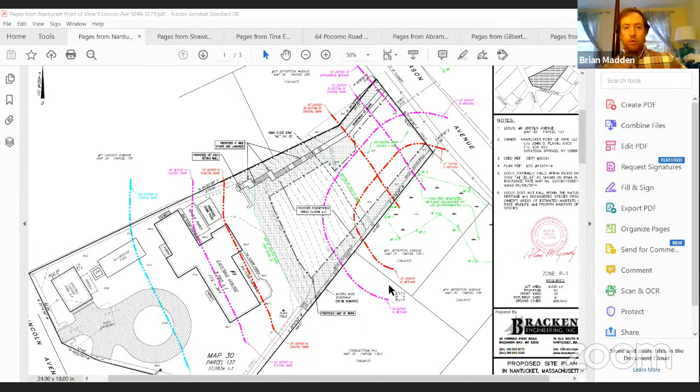Thank you very much. We're going to request a continuance to October 29th as well. Sorry for the late notice. Okay, so this one will continue until October 29th as well. Thank you, Brian. Thank you.

That moves us on to Shawkemo 1 LLC at 36 Shawkemo Road, represented by Brian Madden and Don Bracken. Thank you very much, for the record, Brian Madden.

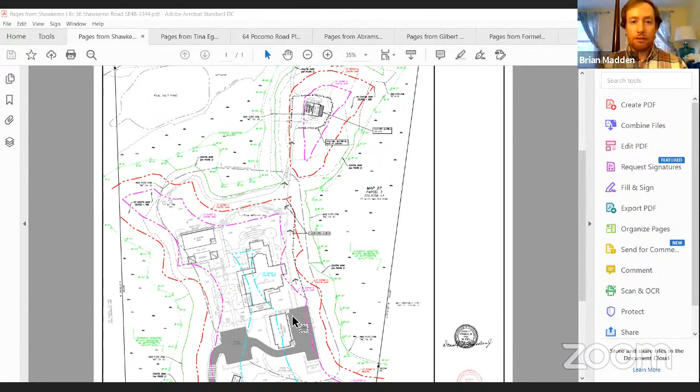At the last meeting we continued because we didn't have the natural heritage letter, which we do have now, showing no adverse impact, no take. We've shown the proposed construction access route that avoids any intrusion into the 25-foot naturally vegetated buffer zone. On the east side of the house, abutting the retaining wall, that's all through previously landscaped conditions, primarily planted arrowwood shrubs that will be replaced in kind post access, meeting up with the existing lawn area and footpath out to the work areas. No waivers are being requested, and I'll turn it over to questions.

Thank you, Brian. Are there any questions from commissioners? Looks like not. Are there any questions from the public? We have not received any comment, but we do have all of the required information to close.

All right, Brian, would you like to close? Please. Is there a motion to close? Motion to close, Dave. Maureen, do you want the second? Yes please. Maureen gets a second, so by roll vote: Beal, aye. Engelborg, aye. Erisman, aye. Golding, aye. LaFleur, aye. Phillips, aye. That carries unanimously. Thank you very much. Thank you, Brian.

That moves us on to Tina Eger McGoldrick Trust at 33 Quidnet Road, represented by David Haines. Good evening. This notice of intent was opened, I believe, four weeks ago. We discussed it and continued because we had comments from Natural Heritage that we had to address, in that they wanted a revised plan, including basically the revised layout of the driveway.

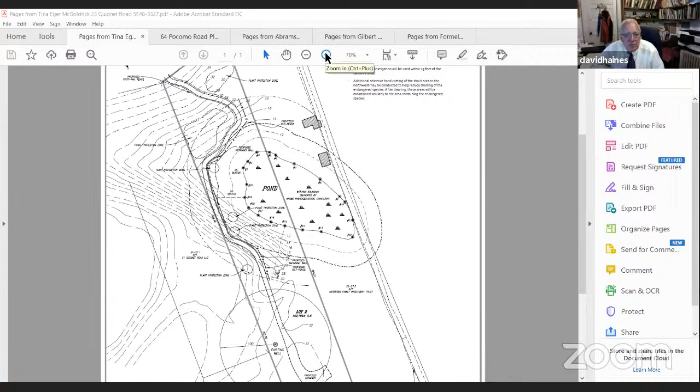Also, they had questions about grading and requested fencing to be put up. So we've revised the plan and the layout to avoid sensitive plants, and we've put up a split rail fence along the edge of the driveway. In some areas, we're proposing a low retaining wall on the downhill side of the driveway to limit grading and prevent intrusion toward sensitive plants. All work will remain outside of any existing vegetation within 25 feet. There's one small area where the driveway just barely hooks into the 50-foot zone; other than that it's outside the 50 all the way. All structures are outside of 50.

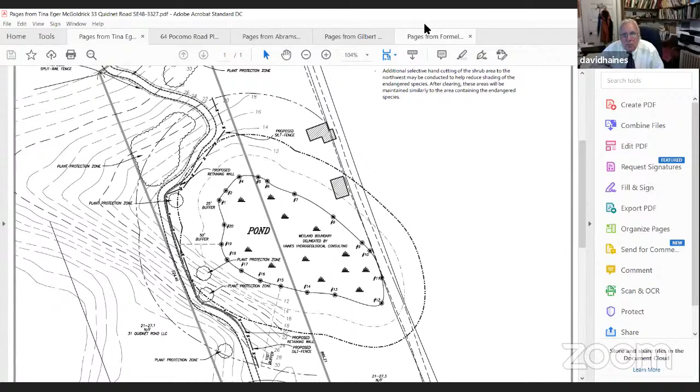There's no need for any dewatering, and so there are no waivers requested from the commission. With that I would send it back to the commission. Thank you, David.

All right, are there any questions from commissioners? Dave? Curious what type of retaining wall is going to be built alongside the east side of that drive? It hasn't been designed yet, but what I was envisioning is basically some sort of wooden sheet piling. It's only going to be a couple of feet high, so without a footing. It's got to be designed; it hasn't been designed yet.

Okay, thank you. Any other questions from commissioners? Maureen? David, I was wondering on the existing asphalt driveway, which I know is not at issue here, but where you see that coming down, it must be old since it comes quite near — it looks like within the 25 of whatever the wetland is that's denominated there. Are they going to do anything with the old driveway? Do you know? I'm just curious because obviously it's asphalt and would be nice if it weren't there. Well, we discussed that, and I first envisioned that driveway would be removed.

However, because of the sensitive plants that are out there, our driveway is basically only 8 feet wide, and we would like to keep that second driveway for emergency vehicles and gas trucks. So that's why we'd like to keep it; I understand the commission's concern about that. I actually got this driveway permitted about 25 years ago, when there wasn't a 25 and 50-foot setback. I don't remember having asphalt in it, but that I'm sure was all taken care of. Okay, thank you, I appreciate the information.

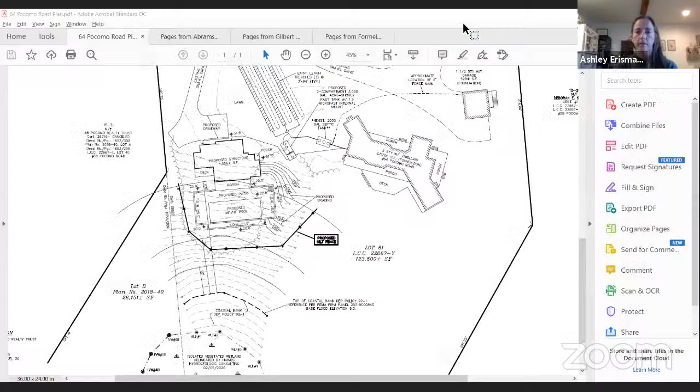What is proposed at 64 Pocomo Road is the construction of a swimming pool and a porch, with an associated pool house that's just outside or right at the buffer zone. This is in the buffer zone, there is a coastal bank by policy, and there's also an isolated vegetated wetland at the bottom of the slope.

All structures will be outside of 50. Basically, the existing shrub line will be maintained, except for some areas inside of 50, outside of 50. The pool will have a retaining wall around it on the lower side to limit any kind of grading.

It'll be a canister filter that will require no discharge of any water into the buffer zone. There's sediment and erosion controls shown as a silt fence, with extra on site. All soils will be loamed, disturbed areas will be loamed and seeded or landscaped as appropriate. Basically that's my presentation.

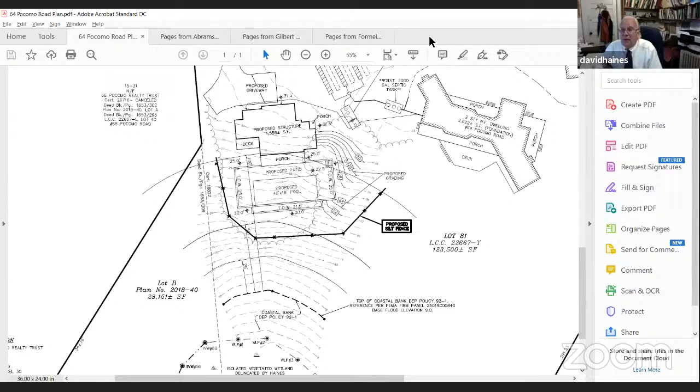Thank you, David. Any questions from commissioners? Looks like no. Jeff, do we have any questions from the public? I asked a little bit late, but we haven't had any at this point.

Jeff, do we have everything we need to close this one? Yes, you do. All right, David, would you like to close? Please. Is there a motion to close? Motion to close. Motion made by Maureen. Is there a second? Seconded by Dave.

By roll vote: Beal, aye. Engelborg, aye. Erisman, aye. Golding, aye. LaFleur, aye. Phillips, aye. That carries unanimously. Thank you, David. Have a good evening. You too.

That moves us on to Abramson at 80 Millbrook Road, represented by Mark Rits. Good afternoon, Mark Rits from Site Design, representing the applicant at 80 Millbrook.

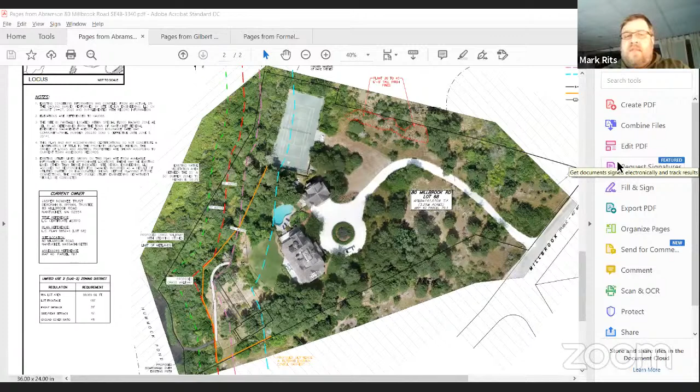During the last hearing for this project, the commissioners raised concerns about trees on the property within jurisdictional areas, and requested seeing a site plan backed with a current aerial photo, which we have provided, showing the extent of trees within the limit of work and jurisdiction on the lower left-hand portion there.

There was also a request to provide a detail of the retaining walls for the pool, and that's actually a double retaining wall, vanishing edge pool, and then a retaining wall below it. That detail has been provided.

The applicant also went out and flagged the trees in the work area that would be removed, the pitch pines. We counted approximately 21 trees. There was a little debate because one or two looked pretty dead, 3 to 4 inches and didn't look to be alive. But we estimate approximately 20 trees will be removed, varying in caliper width from about 4 inches to 10 to 12 inches on some of the larger ones.

The applicant has proposed to replant 30 to 40 pitch pines along the northern portion of the property, shown on this aerial plan a little further up the page. If somebody could please scroll us. It's the area outlined in red.

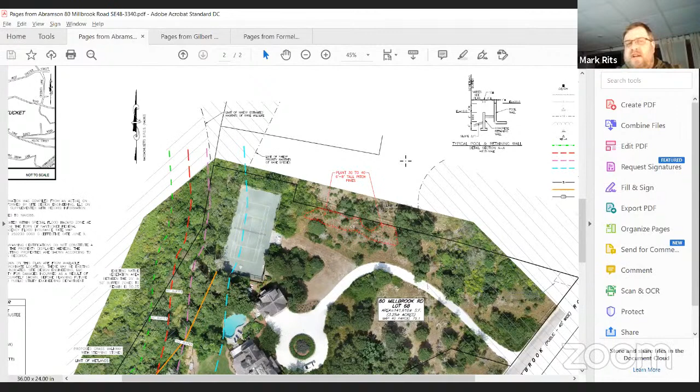We chose that particular area because there are two stands of pitch pines, one to the east and one to the west of it, and we thought we would plant in that relatively sparsely vegetated area, mostly grass with a few existing trees. We would plant 30 to 40, 6 to 8 foot nursery stock pitch pines there to provide mitigation for the lost trees and a greater contiguous pitch pine habitat. That's basically all the additional information I have, happy to answer any questions.

Thank you, Mark. Are there any questions from commissioners? Mark?

Thank you, Madam Chair. I'm having a hard time reading the plot plan. I've got it in front of me, pretty well blown up on my computer, and I can't quite see how the pool will be sited in terms of the grade. There's a substantial grade there.

I want to be reassured that you're not going to be disturbing inside the 50-foot zone there with the corner of the pool being on the edge, and I just wonder how that will be constructed at the time of building, and what will the ultimate elevation be of the pool?

The elevation of the pool will be at 20, and if you look up the top of the page just to the left of the legend, there's a cross section showing it's going to be a double retaining wall. The edge of the pool itself will function as an approximately 4-foot high wall, vanishing edge pool.

Then there will be a narrow area approximately 4 feet wide to capture any splash. And then there will be a second, lower 4-foot retaining wall that is on the plan, shown as the double line that comes up just to the 50-foot buffer.

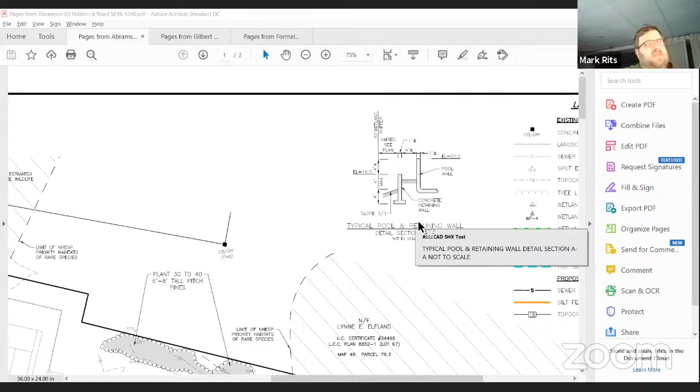Are you confident you can do all that and not disturb our 25 to 50-foot zone? Well, we are proposing grading in the 25 to 50-foot buffer zone there. We're just not proposing any structure there.

Gotcha. And what'll the surface of the path be like? That portion of the path will be grass. We are proposing, if you look just to the north of the pool, we have proposed contours at 12, 14, 16, and 18. We have a pretty steep grade change there.

We're proposing just interspersed stone pavers there, just to have a little bit of a step effect, not building a full staircase or anything, but just putting down a couple of isolated stone pavers.

Then the portion of the path that goes to the west of the pool and all the way down to the dark gray shaded portion, that will just be a grass path. The dark gray shaded portion, which goes from the 25-foot buffer into the wetland, is an existing path already, and that will be the elevated walkway.

To provide adequate room for plants to grow underneath it. But that's an existing path. We're not proposing a new path.

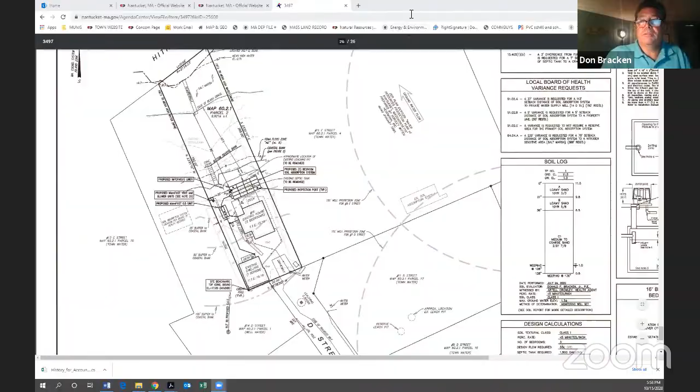Thank you. Are there any questions from commissioners? Looks like no. Jeff, are there any questions from the public at this point? No, ma'am. Do we have everything we'd need to close this one?

Yes, you do. Don, would you like to close? Yes, please. Is there a motion to close?

So moved. Motion made by Beal. Is there a second? Seconded by Dave.

So by roll vote: Beal, Aye. Engelborg, Aye. Erisman, Aye. Coleman, Aye. LaFleur, Aye. Phillips, Aye. That carries unanimously. Thank you, Don. Thank you.

And that moves us on to Jean Francois Formella at 8 Old Westmoor Farm Road, represented by Paul Santos. Thank you. Paul Santos on behalf of the owner and applicant, JF Formella.

This is a notice of intent application for work at 8 Old Westmoor Farm Road. This property was before you within the last few months, when we filed the request for determination of applicability to confirm the resource areas, those being a bordering vegetated wetland and the limits of a certified vernal pool that occurs on the abutting property and a portion of this property.

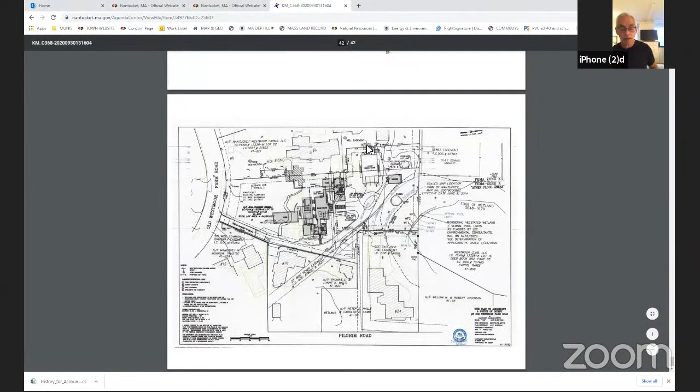We will also be removing the existing gazebo, which is within Concom jurisdiction and actually falls within the regulated setback, the no-build setback for the vernal pool. The gazebo has been there for some time and was constructed before the designation of the vernal pool. So the 2 existing structures will be removed and the gazebo will be removed.

We'll then redevelop the site by constructing a new single-family dwelling that will occur outside of the 100-foot buffer zone, but we will be constructing a small garage that will occur within the buffer zone. It will be outside of the enlarged setback to the vernal pool, which increases the 50-foot no-build to 75 feet, so we will be outside of that setback with the garage.

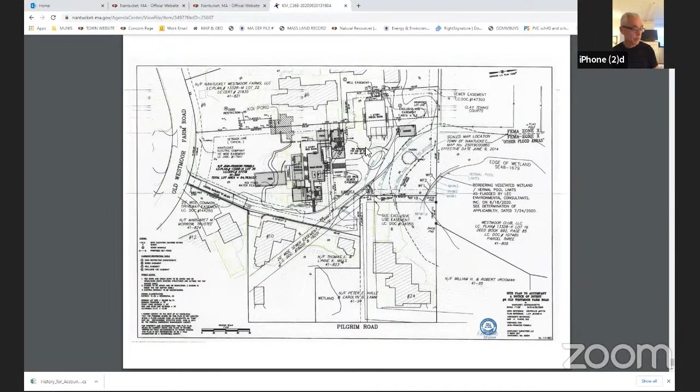This garage is a modest 1-story structure, approximately 28 by 18 feet in dimension. The driveway will then also be reconfigured to accommodate the relocated dwelling and the relocated garage. The work occurs outside of any mapped NHESP jurisdictional area, and there are no waivers required with the application. I'm happy to answer any questions that the commission or staff may have.

Thank you, Paul. Are there any questions from commissioners? Looks like no. Jeff, are there any questions from the public on this one? We have not had any questions or comments, but we also do have all of the required information before you ask that question too. Okay, thank you.

So Paul, since there's no questions and we have all the required information, would you like to close? Yes, please. Is there a motion to close? Motion made by Seth. Is there a second?

Seconded by Dave. So by roll vote: Beal, Aye. Engelborg, Aye. Erisman, Aye. Golding, Aye. LaFleur, Aye. Phillips, Aye. That carries unanimously. Thank you, Paul. Thank you.

And that moves us on to 11 Crooked Lane LLC at Westchester Street Extension, represented by Art Gasbarro. Thank you, Madam Chair. I'm before you tonight with a notice of intent application to install a low-pressure sewer force main along the traveled way of Westchester Street Extension.

This is the road that runs alongside the animal hospital and the backside of some of the properties known as Hickory Meadow Lane. Shown on the plan in front of you in blue is the bordering vegetated wetland boundary. Shown in red are the 25, 50, and in some cases 100-foot buffer zones. And shown in green is the proposed 1.5-inch sewer force main.

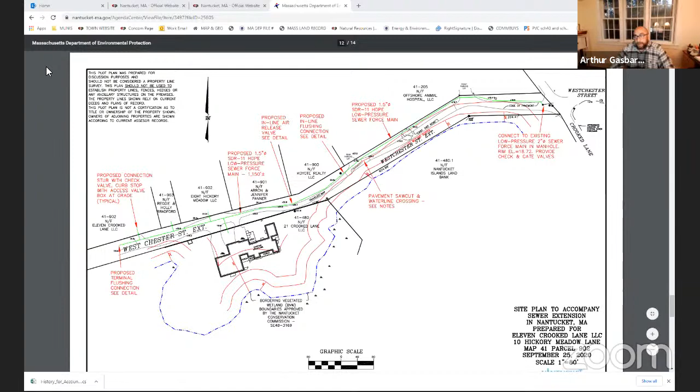Thank you, Art. Are there any questions or comments from commissioners?

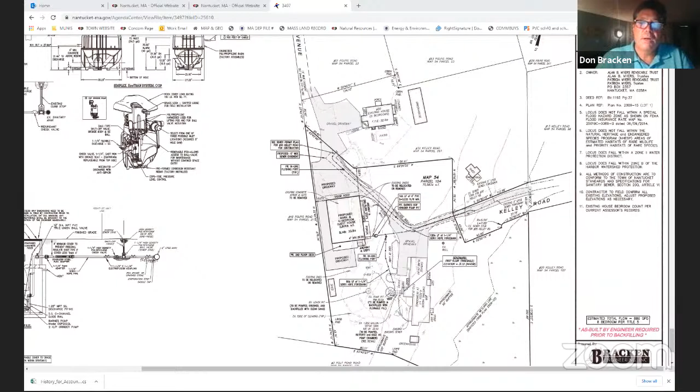Hi again, Don Bracken, representing the applicant. It's a pretty straightforward application to install two 1.25-inch sewer force mains within the existing roadway of Kelley Road. There are already 2 stubs there, and the existing sewer main already exists. Where we tie into those 2 stubs is outside the 50-foot buffer zone from the wetland line, which we took from a 2009 subdivision plan. All work will be within the 100-foot buffer, within the existing roadway area and existing driveway area, with no removal of vegetation. Both the septic systems for number 28 and number 30 will be replaced with these new sewer force mains. With that, I'd be happy to answer any questions.

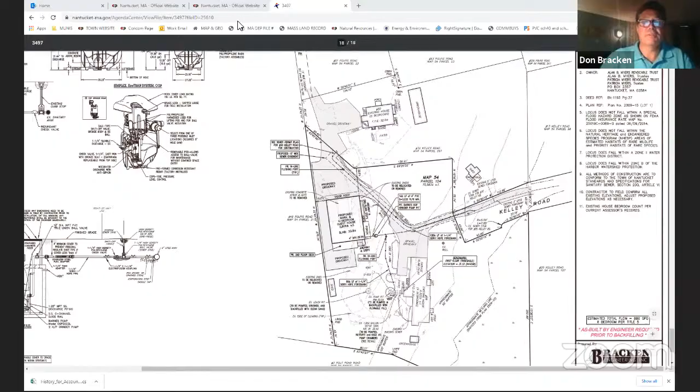Thank you, Don. Are there any questions from commissioners? Jeff, has staff been out to this one, and do you have a recommendation? I know Don said the wetland line is from 2009, but we went around and took a look and feel like it's still fairly accurate for the areas in question. So we feel comfortable in recommending the -3 to allow the work without the notice of intent.

Is there a motion to issue a -3 allowing the work without a notice? Motion made by Mark. Is there a second? Seconded by Maureen. So by roll vote: Beal, Aye. Engelborg, Aye. Erisman, Aye. Golding, Aye. LaFleur, Aye. Phillips, Aye. That carries unanimously.

And that brings us on to Doerte Neudert at 18 Dukes Road, represented by Don Bracken.

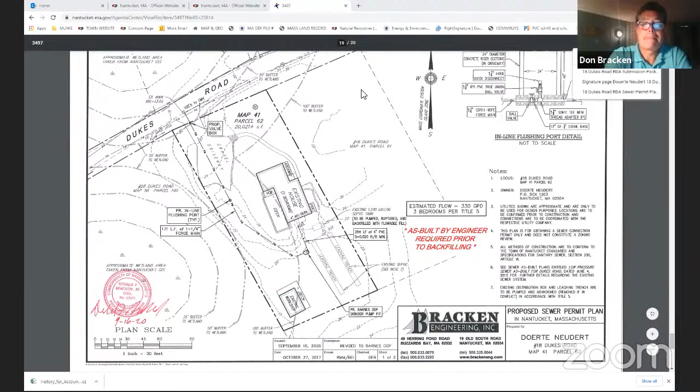Yes, very similar to the last application. This is converting from a septic system to tying into an existing sewer force main located on the same side of the road as the property. The sewer force main will be 1.25 inches, and it will run from the back of the property to the road, all within existing disturbed areas on the lot. When the main goes in, it'll probably be backfilled the same day or the next day. The wetland resource areas were taken from GIS. They're both off-site from the property. With that, I'd be happy to answer any questions.

Thank you, Don. Are there any questions from commissioners? No. Jeff, has staff been out to this one, and do you have a recommendation? Yes, we would recommend the -3 for this one as well.

Is there a motion to issue a -3 allowing for the work without a notice? Motion made by Seth. Is there a second? Seconded by Dave. So by roll vote: Beal, Aye. Engelborg, Aye. Erisman, Aye. Golding, Aye. LaFleur, Aye. Phillips, Aye. That carries unanimously.

Thank you, Don. Sorry, Madam Chair, I seem to have lost my video. I can't, trying to get it back here. That's okay, we see your name, so we know what square is yours.

All right, so that'll move us on to Sea Hero LLC at 7 Pilgrim Road, represented by Mark Rits.

Good evening, Mark Ritz from Site Design, representing the applicants at 7 Pilgrim Road. This property had an RDA done previously that allowed the construction of a house, a pool, a retaining wall, grading, etc. The resource area is an off-site wetland. The 50-foot buffer zone is just northeast of our northeast property corner. The applicant has reconfigured the house and some of the other features on the property slightly. The scope of work has not really changed, but because it was originally an RDA, we couldn't come in and ask for a modification. So we are back before you with another RDA asking for essentially the same thing that was previously approved, with just a different shaped house within the 100-foot buffer. All of the site alteration, grading, and removal of what was previously there has already been completed.

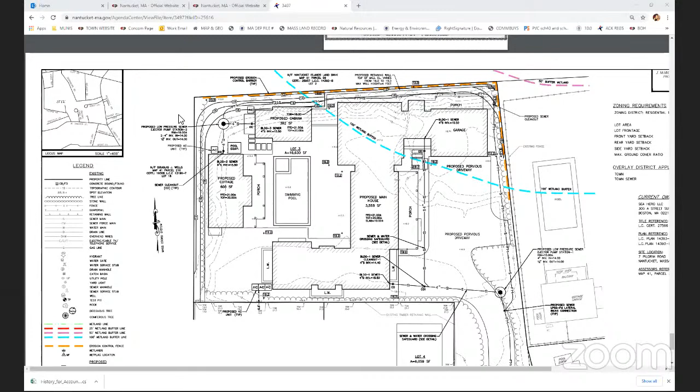Thank you, Mark. Are there any questions from commissioners about this one? Jeff, has staff been out to review? Yes, and we're recommending the -3 for the work as well.

Okay, thank you. Is there a motion to issue a -3 allowing for the work without a notice?

Motion made by Seth. Is there a second? Second, seconded by Maureen. So by roll vote: Beal, aye. Engelborg, aye. Erisman, aye. Golding, aye. LaFleur, aye. Phillips, aye. That carries unanimously. Thank you.

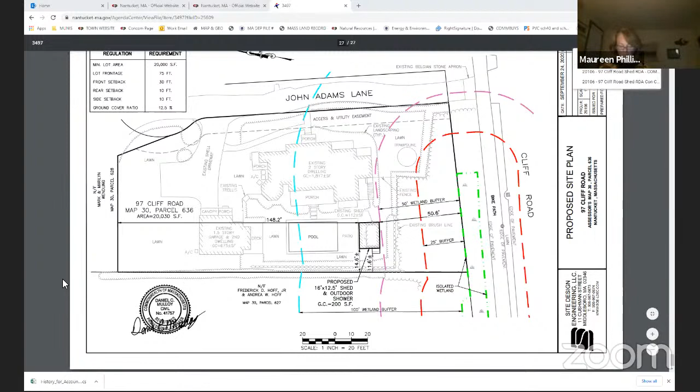That moves us on to John Adams Realty Trust at 97 Cliff Road, represented by Mark Rits. Once again, Mark Ritz from Site Design, representing the applicants at 97 Cliff. This is a property that was previously developed. There's a house, a pool, all the usual amenities. The wetland resource area in question is what would probably be best described as a ditch between the property and the bike path. What the applicant is proposing is to enlarge an existing shed, which is just outside of the 50-foot buffer. There is a shed with an outdoor shower on it. They would like to make the shed larger and keep the outdoor shower. Everything is outside the 50 to the off-site wetland. Thank you, Mark.

Were there any questions from commissioners about this one? All right, has staff been out to check this? Hi, yes we have, and we recommend a plus-2, minus-3. Thank you, Joanne.

So is there a motion to issue a plus-2 and a minus-3? So moved. Is there a second? Second. Seconded by Maureen. So by roll vote: Beal, aye. Engelborg, aye. Erisman, aye. Golding, aye. LaFleur, aye. Phillips, aye. That carries unanimously. Thank you, thank Mark.

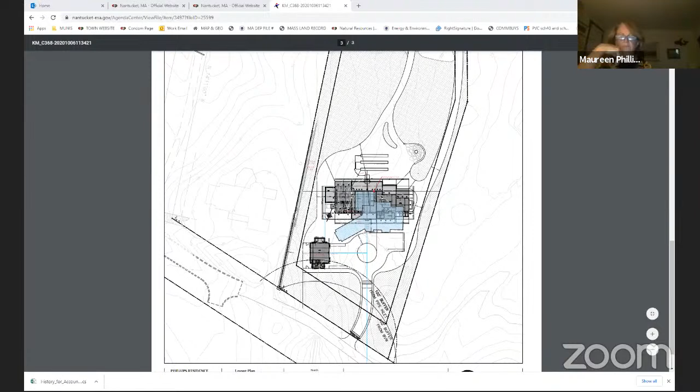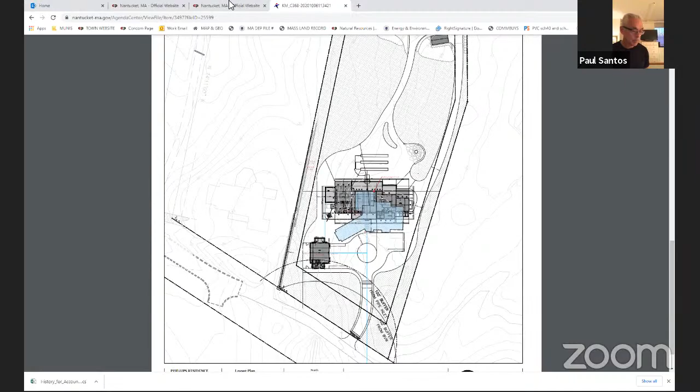That moves us on to minor modifications. Trust of Richard Phillips at 19 East Tristram's Avenue, represented by Paul Santos. On behalf of Richard Phillips, the property owner, this is a minor modification request to a notice of intent issued by the commission for construction of a driveway within the 100-foot buffer zone to a bordering vegetated wetland. The bordering vegetated wetland is located to the south, off-site. It's essentially a drainage ditch that feeds a pipe running through the Phillips property. This application simply moves the driveway slightly to the east, and the proposed garage is moving closer to the south. While the garage is moving, it's still outside of the 100-foot buffer zone to the bordering vegetated wetland. The driveway was in the BVW buffer zone previously, and it still will be—just relocated further east along East Tristram Avenue. That's the extent of the minor modification, and I'd be happy to answer any questions.

Thank you, Paul. Are there any questions from commissioners? Looks like no. Jeff, do we have everything we need to issue the minor mod? Yes. Okay, is there a motion to issue the minor mod? Motion made by Seth. Is there a second? Second, seconded by Maureen. So by roll vote: Beal, aye. Engelborg, aye. Erisman, aye. Golding, aye. LaFleur, aye. Phillips, aye. That carries unanimously. Thank you, Paul.

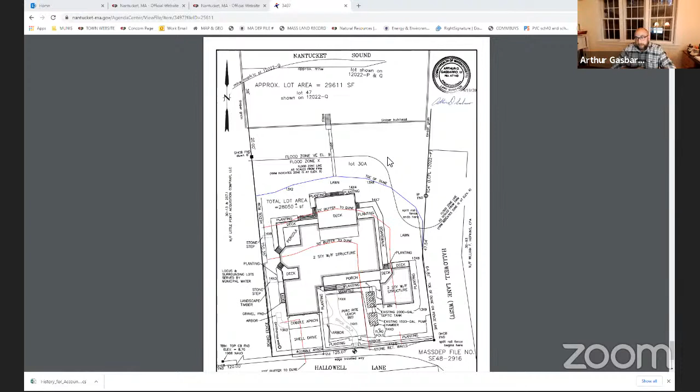That moves us on to certificates of compliance. We have Nancy Seaman at 9 Hallowell Lane, represented by Art Gasbarro. Thank you, Madam Chair. I have prepared the plan before you. The dune line is shown in blue, the 25 and 50-foot buffer zones in red, and down in the southwest corner, a little piece of the 100-foot buffer zone. This was essentially a redevelopment project, as well as a substantial septic upgrade, where we used an Oaks and Perc-Rite type leach system and elevated it in the limited area available on the opposite side of the house from the resource area. We believe the work's been completed in substantial compliance, and I'd be happy to address any concerns or questions. Thank you, Art.

Are there any questions from commissioners? Looks like no. Jeff, has staff been out to look at the site? Yes, and we would agree with Mr. Gasbarro's assessment that the site is in compliance. Okay, so is there a motion to issue the certificate? So moved. I'm going to give it to Mark on this one—we're going to have to go another time for the second. So who wants second? Thank you. Seth? Go. All right, so we'll give the second to Seth. So by roll vote: Beal, aye. Engelborg, aye. Erisman, aye. Golding, aye. LaFleur, aye. Phillips, aye. That carries unanimously. Thank you, Art.

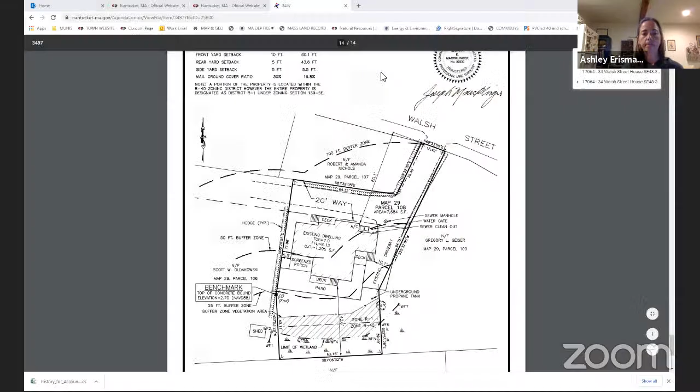That moves us on to 34 Walsh Street LLC at 34 Walsh Street, represented by Mark Rits. Once again, Mark Ritz from Site Design, representing the applicant at 34 Walsh. The project before you allowed for the modification of an existing residence.

There were a few bump outs, and a few areas that were converted from covered patio to structure. There was also a requirement to fence off a portion of the lawn within the buffer zone right up to the wetland, and to replant it with native shrubs. The work has been completed and is in substantial compliance with the order.

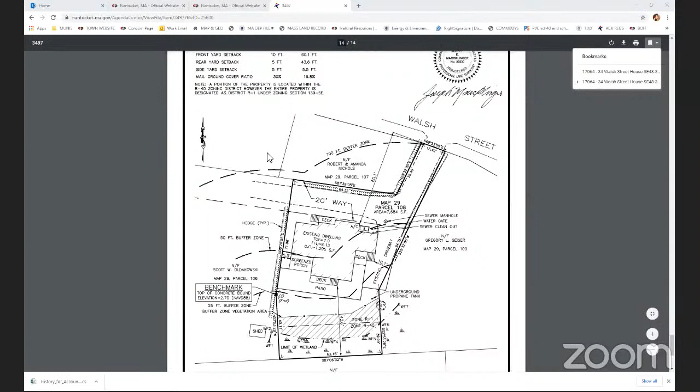I believe Jeff has been out to the site to review it with the landscaper, and with that, I'd be happy to answer any questions. Thank you, Mark.

Are there any questions from commissioners? So Jeff, what is staff's opinion on this one? Staff agrees, but we're also recommending to carry forward condition 19 that required the annual photo monitoring of that area since it was just installed, to get another couple years of those photos done. But the fence is in, the plants are in, everything looks good so far.

Thank you, Jeff. So is there a motion to issue the cert with condition 19 ongoing? Motion made by Dave. Is there a second? Yes, seconded by Ian. By roll vote: Beal, Aye. Engelborg, Aye. Erisman, Aye. Golding, Aye. LaFleur, Aye. Phillips, Aye. That carries unanimously.